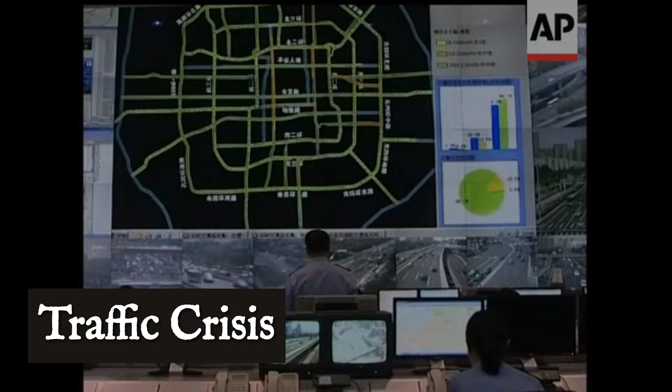Faced with a crisis that threatened the entire nation's future, China unveiled a proposal few could believe: a 200-kilometer underground tunnel, longer than anything built before, slicing beneath mountains and cities in a single bold stroke. Critics said it was too risky, too costly, or just impossible. But two decades after China built the world's longest underground tunnel, the country, and the world, would never be the same. What happened beneath the surface that changed everything?

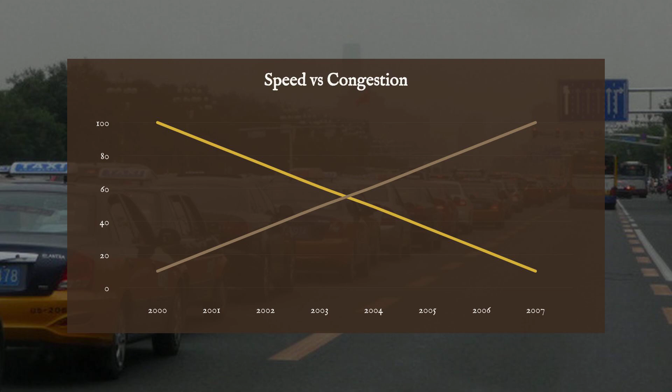Urban China in the late 1990s looked like a pressure cooker with the lid clamped tight. In just 15 years, city populations doubled, swelling from 300 million to more than 600 million. Highways that once carried traffic at 80 kilometers per hour slowed to a crawl, sometimes barely topping 40. Freight trucks idled for hours on ring roads, loaded with goods that couldn't reach factory gates or shipping ports. Major rivers, once reliable trade arteries, clogged with barges waiting their turn to pass through outdated locks.

It wasn't just about inconvenience. Factories missed deadlines, perishable goods spoiled, and entire regions lost out on billions in trade. Every day the gridlock deepened. The old infrastructure, built for a much smaller, slower nation, was buckling under the weight of explosive growth. China's economy ran on speed, but the arteries of commerce were seizing up. The challenge was clear: find a way to break through, or watch the country's future stall in traffic.

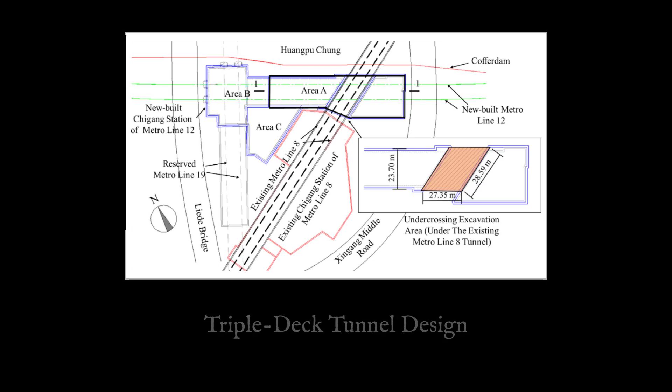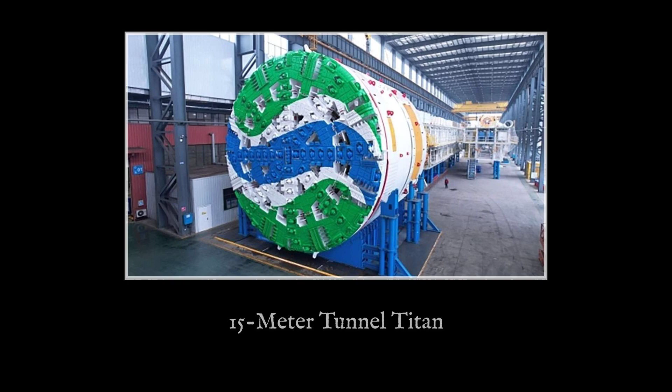Blueprints for the tunnel looked more like something out of science fiction than civil engineering. On paper, it would stretch an astonishing 200 kilometers, farther than the distance from Beijing to Tianjin, and all of it beneath the surface. The design called for a multi-deck layout, with separate levels for high-speed trains, freight, and emergency vehicles. To carve through the earth, engineers specified a tunnel boring machine with a diameter of 15 meters, roughly the height of a 5-story building.

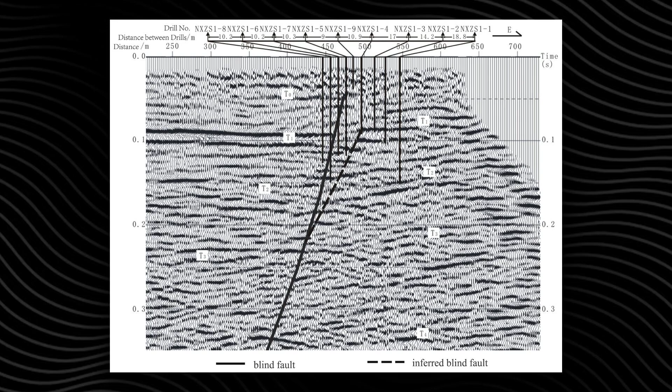The route would cut across 17 distinct geological strata, from soft river silt to ancient bedrock, demanding a level of geological mapping that had never been attempted at this scale in China. Planners pored over seismic charts, soil samples, and hydrological models, trying to anticipate every twist and hazard hidden underground. The lead engineers, many of whom had cut their teeth on the first wave of China's expressways, now faced a challenge orders of magnitude greater. Every calculation, every material choice, every safety protocol had to be reimagined.

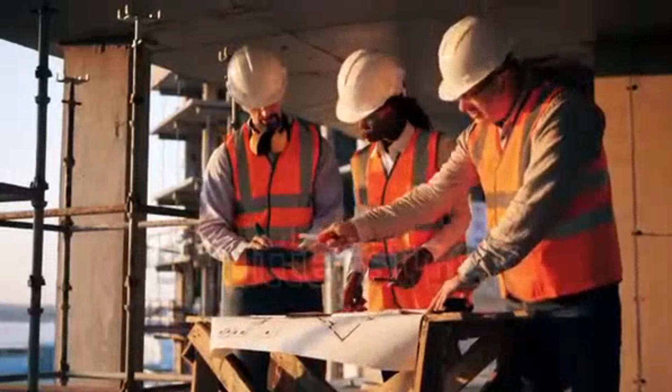The audacity of the plan was hard to overstate. No country had ever attempted to link entire provinces with a single continuous underground artery, let alone one designed to last a century. Even among the project's own architects, there were moments when the sheer scale of the blueprint seemed almost impossible. But in the eyes of the planners, the only thing more unthinkable than trying was standing still.

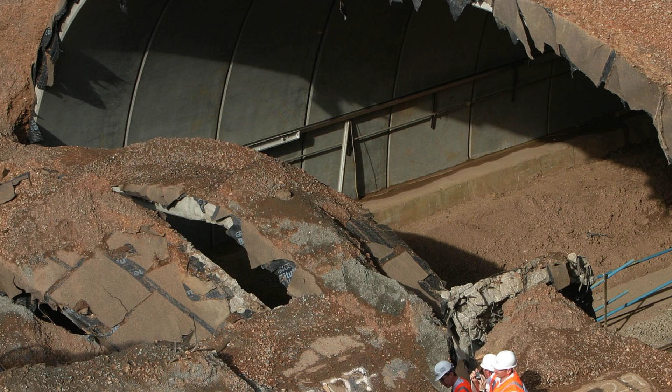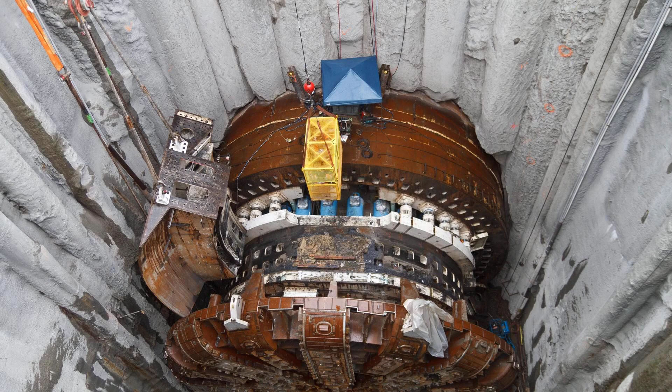Inside the tunnel, the pressure never let up. In 2005, a surge of groundwater punched through a weak point, flooding nearly 2 kilometers of newly bored passage. Pumps screamed for hours, but water kept rising, forcing crews to scramble for high ground. Days later, a rock burst sent shards flying through the work zone, crushing steel supports and injuring several miners. The tunnel boring machine, already battered from weeks of non-stop grinding, seized up when its cutter head jammed in a seam of quartzite. Mechanics worked around the clock, but the repairs dragged on, bleeding time and money.

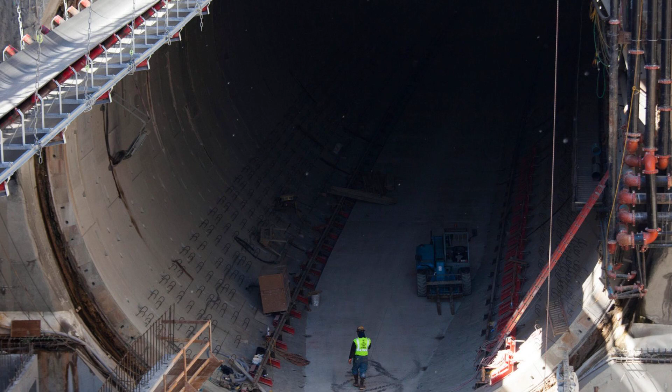The project's budget, once projected at $2 billion, ballooned past $5 billion. Tensions boiled over. When paychecks arrived late and safety fears mounted, hundreds of workers walked off the job, leaving a skeleton crew to hold the line. In the break rooms, shift supervisors counted the hours until the next crisis. For many, the only certainty was that the tunnel demanded everything, and sometimes it took more than anyone expected.

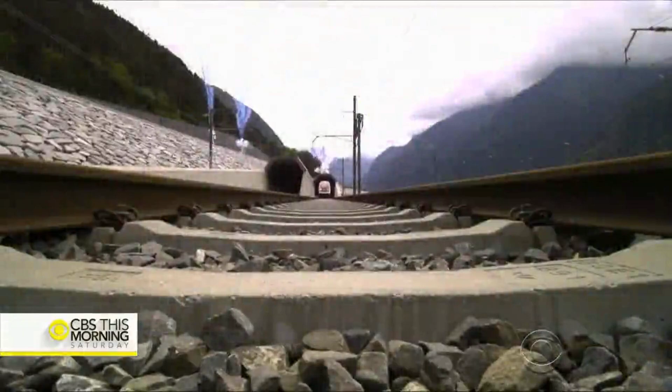On a cold morning in late December, the tunnel's two ends finally met, deep underground, after years of relentless digging. Rail officials in crisp uniforms lined up for the cameras, while media crews jostled for a clear shot of the ceremonial ribbon. The first freight train rumbled through, headlights flickering off the tunnel's fresh concrete walls, pulling carriages loaded with electronics, machinery, and fresh produce. For the workers who had spent years in the dust and darkness, that moment felt like daylight breaking after a long night.

Within hours, logistics companies were recalculating their schedules. Trains that once crawled over mountain passes or detoured for days now shot straight through, slicing travel times by more than half. In some regions, what used to take a full day by truck could now be done in just a few hours by rail. For city officials and business owners, the tunnel's opening wasn't just an engineering win, it was a promise delivered. Suddenly, the impossible was routine. Goods moving at speeds the country had only dreamed of, linking provinces that once felt worlds apart.

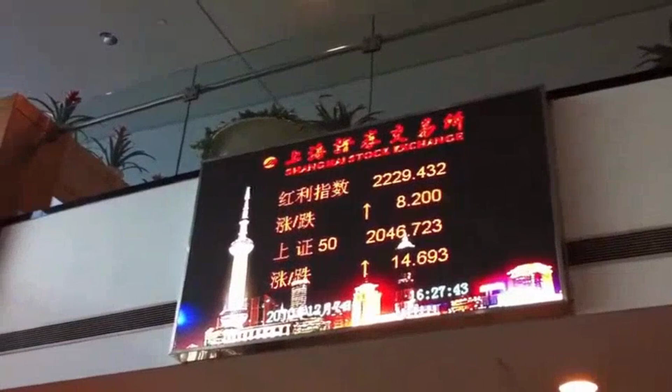The breakthrough wasn't just a technical milestone. It was the start of a new rhythm for China's economy, a shift that everyone could feel, from the conductors in the cab to the traders checking their watches.

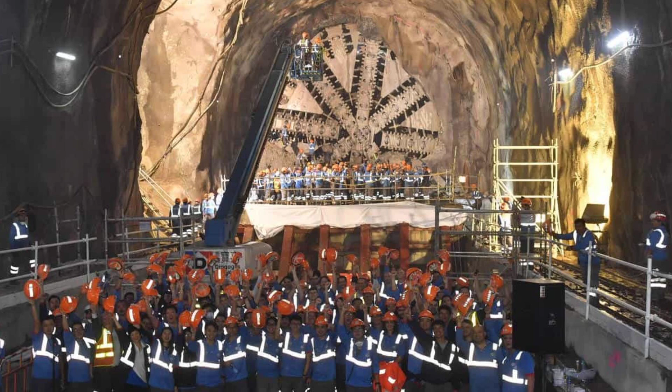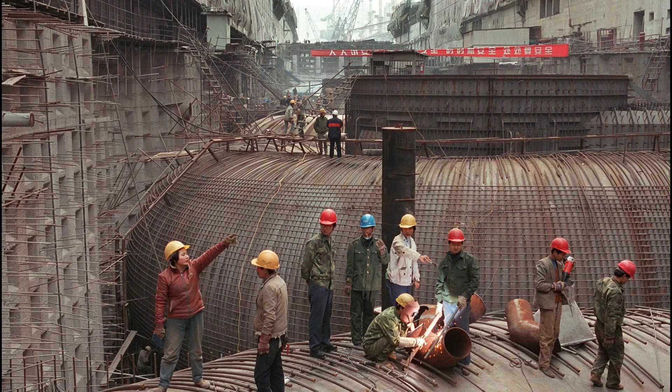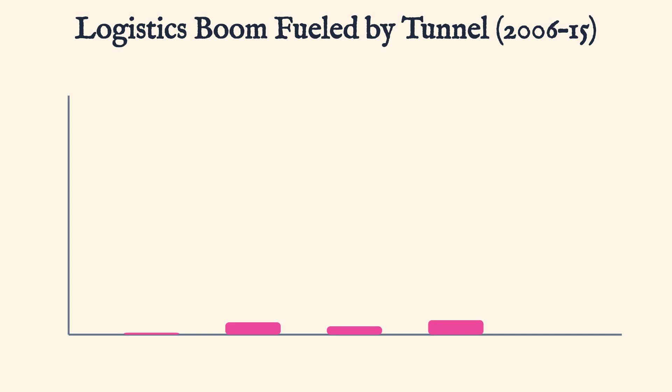On December 20th, 2005, when the final section of China's record-setting underground tunnel broke through, freight transit times across the region dropped by 70% almost overnight. In just 2 decades, the project's 200 kilometers of reinforced concrete and precision engineering reshaped how people and goods move through China. Official records show that the population in urban centers doubled during this period, while economic reports attribute billions in growth to the tunnel's impact on logistics and trade.

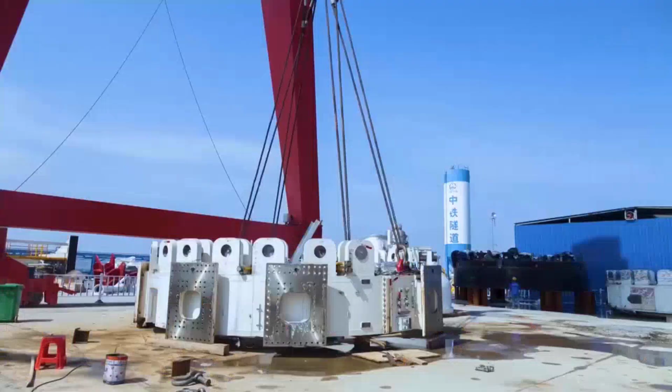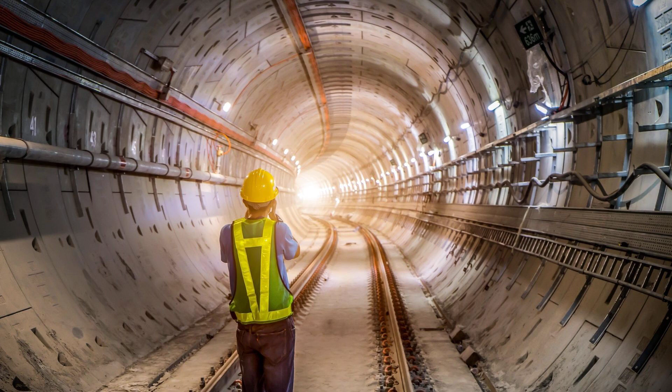Yet some aspects remain undisclosed. Detailed construction archives and full technical blueprints are still classified by the Ministry of Transport. What is clear, however, is that the tunnel's success established a new global benchmark for underground infrastructure and inspired similar projects worldwide. Today, high-speed trains and vast cargo flows pass beneath cities that once faced gridlock. The evidence leaves no doubt. When faced with a national crisis, China's engineers changed the rules of what is possible underground.